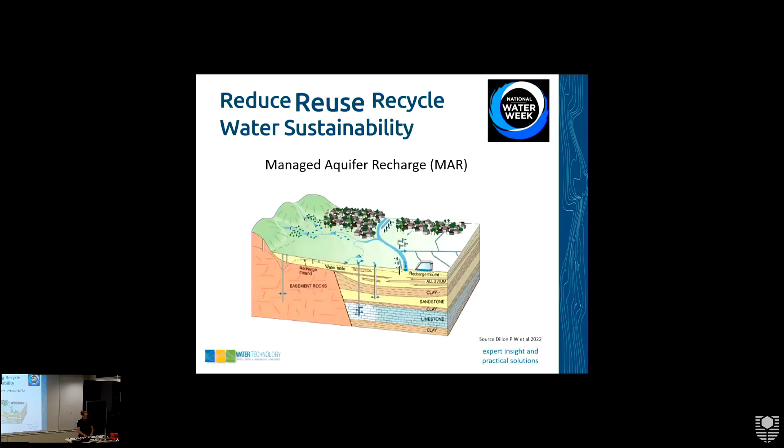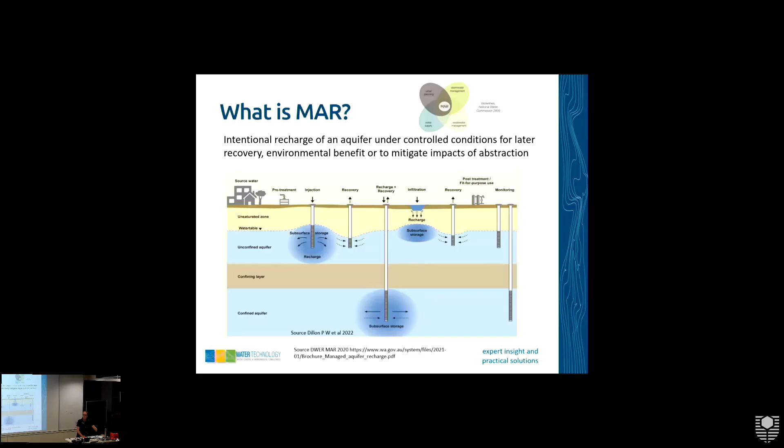So what is MAR? It's the intentional recharge of an aquifer under controlled conditions for later recovery, environmental benefit, or to mitigate impacts of abstraction. It can be very simple, including stormwater drains or storage dams, or they can be rather engineered, like injection and recovery systems. You can also get very complex stormwater capture systems on top of that.

MAR is successfully used worldwide for various reasons. It's a very adaptable technique, used for managing water supply, meeting legal obligations, restoring and protecting aquifers, maintaining minimum flows and levels, flood mitigation, water quality enhancement and protection, water reuse, and ecosystem restoration and protection. So a whole slather of options of how this technique can be applied.

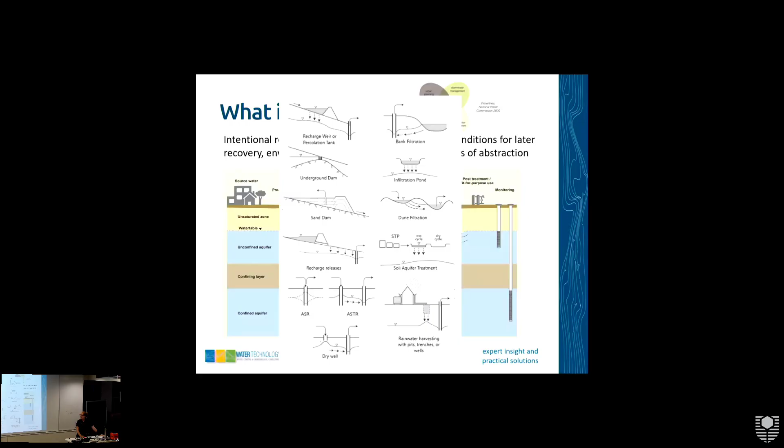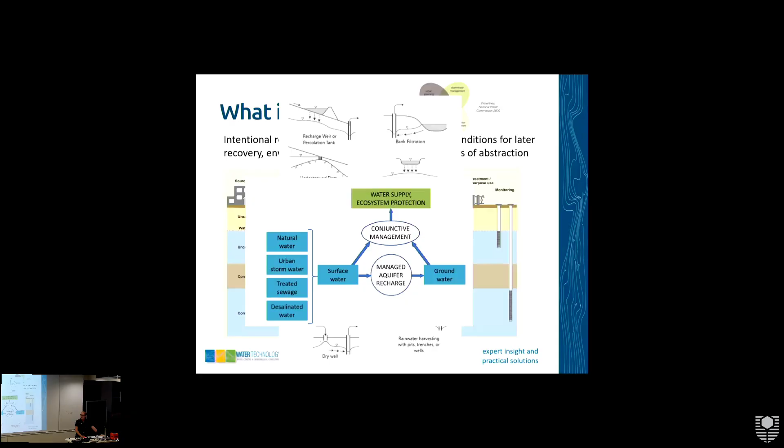General application of MAR in Australia is related to the capture of surface water, stormwater, or treated wastewater, which is directly or indirectly recharging the underlying aquifer system, to be later used predominantly for irrigation purposes or irrigation of green spaces.

So what are we doing over here in Perth? Well, we have 4 well-known MAR schemes. Some of you in the room probably know a lot more about these schemes than I do, but this is just a quick snapshot of these schemes.

The first one, and probably the biggest, is the Water Corp Groundwater Replenishment Scheme. Essentially, wastewater from the Beenyup wastewater treatment plant is treated to drinking water standards and then injected into the local aquifer system. It's then recovered to supplement Perth's drinking water supply.

I honestly didn't even realise that was a large part of our integrated water supply scheme here in Perth. The City of Mandurah uses wastewater from the nearby Caddadup wastewater treatment plant, which has been infiltrating via infiltration basins into the surrounding superficial aquifer. It's caused a mounding effect under that irrigation area, and that wastewater is then abstracted and used for irrigation purposes on green space by the City of Mandurah.

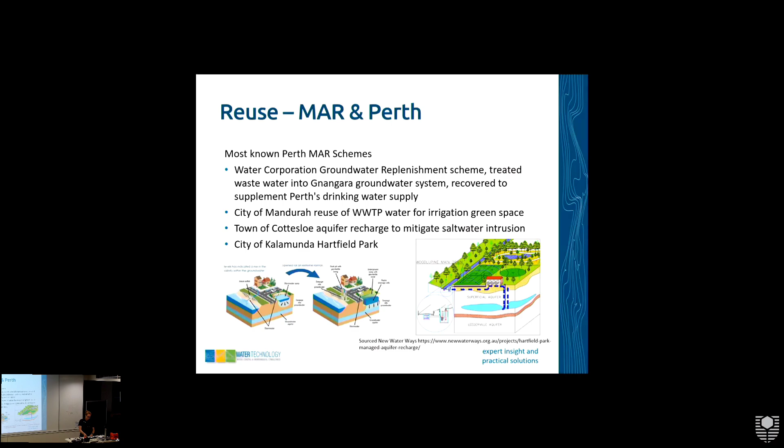So just a couple of examples of how MAR is also being used over here in WA and also in South Australia.

We were engaged by a client up in the Pilbara to undertake some groundwater modelling to help with understanding their drawdown impacts from mining and how that propagation extends into the Karijini National Park. They had a trial MAR scheme set up close to the boundary of the national park, and they completed a trial. We were engaged to model using that trial data and their drawdown data to understand if the MAR scheme, or the extent of it, can actually mitigate the impacts from mine dewatering.

This was a requirement from the regulator, so they had to do it. In the very first stages, we developed a groundwater flow model to simulate drawdown propagation from the mine dewatering and used the model to inform an optimised MAR scheme to mitigate simulated drawdowns.

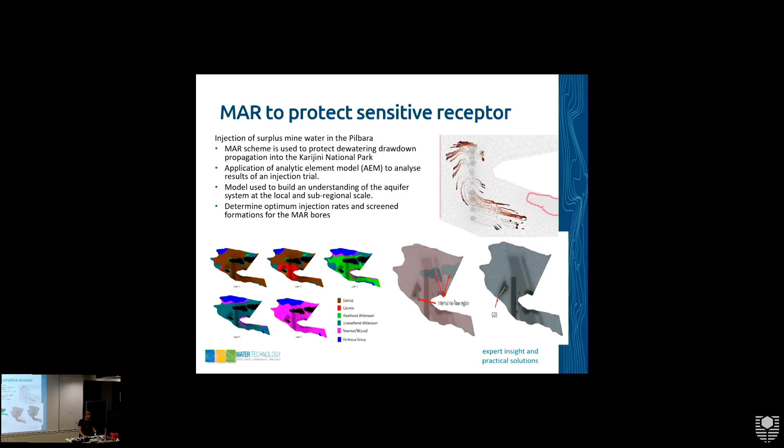Another example of how MAR or ASR can be used: the reuse of wastewater treatment plant treated wastewater to supply a horticultural enterprise with irrigation. It was essentially capturing water during winter when there was a surplus and then using it during summer when there's higher demand.

The treated wastewater was injected into the underlying aquifer system during high periods and then later recovered through the same injection, using dual purpose injection-abstraction bores. So we looked at the aquifer suitability.

The assessment looked at all the aquifer parameters, including aquifer thickness and hydraulic properties. Water quality is very important - if we don't put effort into the water quality side of things, it can catch us quite hard during implementation, especially in the operational phases, and it can become very costly. We also looked at the impact of proximity to other users in the area.

In terms of technical aspects, we looked at clogging and water chemistry changes from the injection water - is it actually going to change the natural water chemistry within the host aquifer? We also considered matrix dissolution, local effects on the overlying aquifer, piezometric pressures, effects on the preferred aquifer, and the likely occurrence of opportunistic pathogens developing and growing.

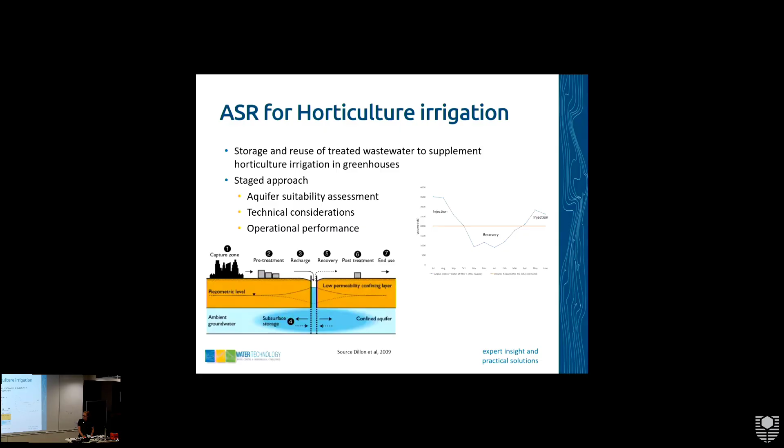Finally, the last example, probably one of the most common ones, similar to what we've already seen happening here in Perth - a golf course investing in the option of a MAR to support irrigation.

Again, capturing excess water and using it for irrigation. This particular golf course didn't have the luxury of being able to use the groundwater it sits on top of, because it actually became quite saline due to over-abstraction. So they had to think of another way of doing things, and again, MAR came up on the table.

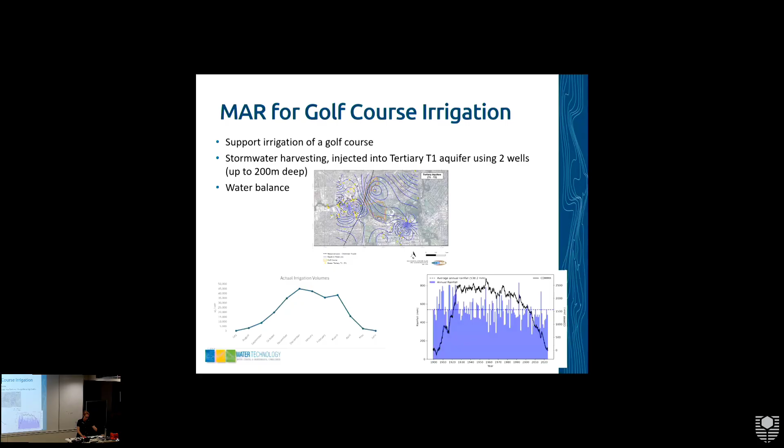In this case, again, we followed a very similar process - looked at the storage requirements of the aquifer, their operational water balance, the local hydrogeology and the implications that might have with injection water, and further investigated and supported them through the approval process to develop a MAR scheme.

Just a nice short sweet one for you all - summary and key takeaways. MAR is very applicable for Perth and more broadly WA to help with water sustainability. There's opportunity open for all industries to adopt the concept of MAR, like I've explained - in mining, local government, private use, wherever. And there's probably a lot of multidisciplinary action going on too, to get a MAR scheme up and running.

WA is in its infancy, which I like to think of as an opportunity when it comes to MAR implementation and applying it as a value-adding option. So it's about trying to get MAR on the table in that discussion as an actual option.

There's lots to learn from around the world. The rest of the world does MAR really well, especially over in Europe. And obviously our mates over in South Australia are leading the charge in Australia, I should say.

There's a big link between MAR and water chemistry, since a lot of you guys probably have quite a big chemistry background. I thought I'd better call that one out.

Clogging is a major issue with MAR. If that's not addressed early on, it's going to cause lots of operational issues, and that puts the whole MAR concept with a black stain against its name because it's not working, we can't inject the water, it's clogging up - those type of conversations. But if you're on top of it nice and early, there are ways to mitigate that.

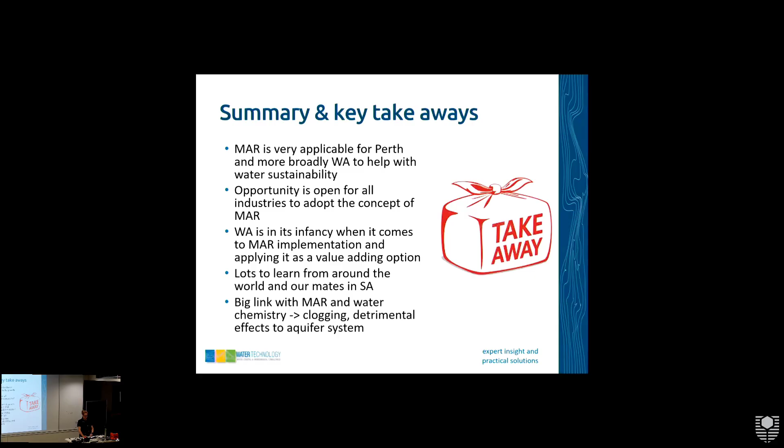Thanks everyone for turning up. I've taken a little bit of a different tact. Apologies for the slideshow, but rather than make this too technical, I'm going to run you through a couple of case studies and show you where we're at the moment on the Alkimos seawater desalination plant, which is full steam ahead at the moment. We're probably about 15 or 20% of the way through the construction phase. So just a little bit about me.

I'm an ex-graduate here at Curtin University, finished my PhD here, feels like a long time ago. Before moving across to industry, I first worked on the Kwinana desalination plant, so that's 2005-06 timeframe, and been in the industry ever since.

So just tonight we'll run through a little bit about osmosis and reverse osmosis, give you a run through on desalination, and then show you what's happening at Alkimos out of interest in terms of large scale desalination.

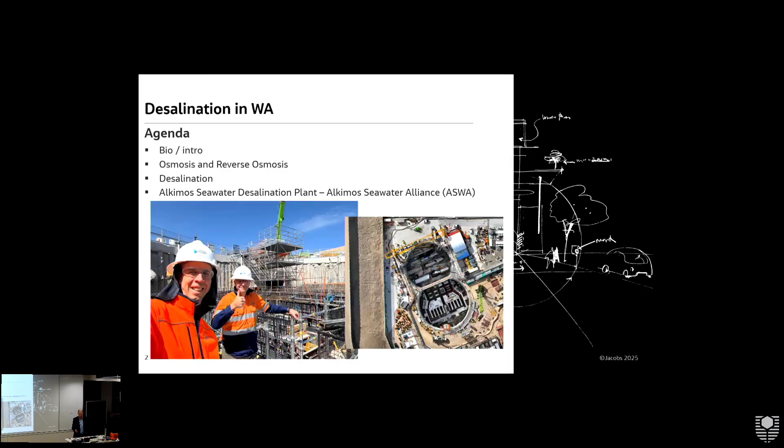This isn't going to be anything shattering for anyone in the audience here, but the central premise of what we're talking about here is osmosis and how we're going to overcome that.

Again, a fairly well understood concept, osmosis is nature's way of achieving equilibrium. The important thing is just having a look at the type of pressures we're trying to overcome. Obviously you can calculate osmotic pressure. Osmotic pressure of seawater is in the order of 25, 27 bar at 35,000 milligrams a litre, which is the salinity of seawater.

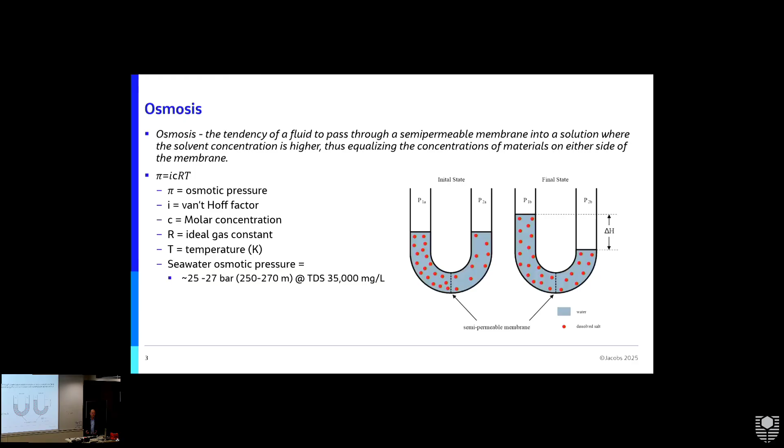So these are the type of things we have to overcome with reverse osmosis - just an easy way to demonstrate that. As we say, we're trying to achieve equilibrium, and this is what we're talking about in terms of the height difference. So this is the central concept of reverse osmosis, is overcoming that.

Inside there we have just over 30,000 RO membranes sitting inside a little over 400 pressure vessels in 8 racks. This setup here is delivering around about 10% of Perth's water just in this room, producing sort of 75-80 megalitres a day of drinking water. Just to give people some idea of the scale of what we're talking about.

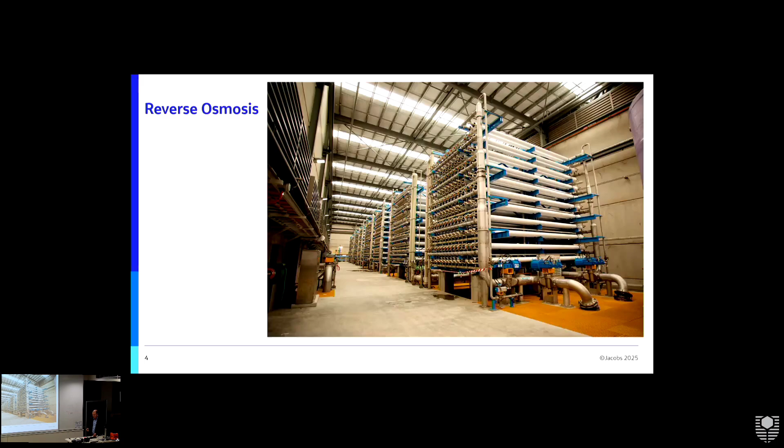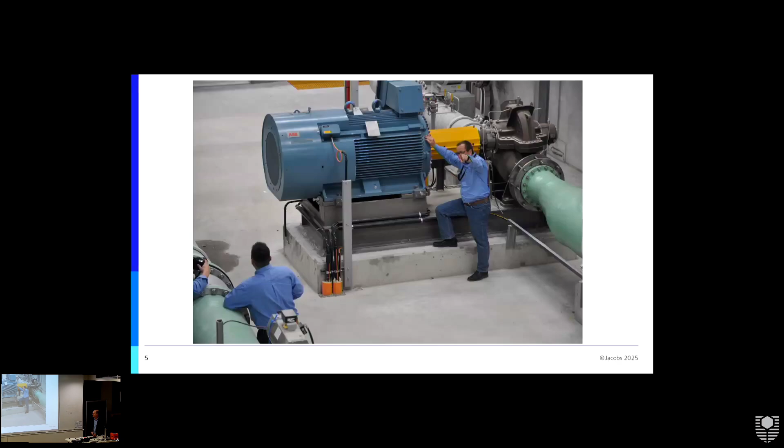This is Ulrich Boss, who was the commissioning manager of that project, standing at the first pass high pressure pump. We're taking about 300 litres a second of water there and increasing the pressure, at this point, from about 2 bar to a little over 60 bar on a continuing basis. Just so everyone's got an idea of the scale of what we're going through here.

I'll talk you through a bit of the pre-treatment, which is the crux of what we're going around here. Boosting the pressure through a first pass RO membrane. One of the things that makes this kind of economical is we only treat a portion of this water through a second pass system. All the seawater goes through here, and the purer water generated by the first few membranes in a pressure vessel bypasses that second pass system. The less pure water we treat again to get the product salinity down as low as possible, and then that water is disposed of.

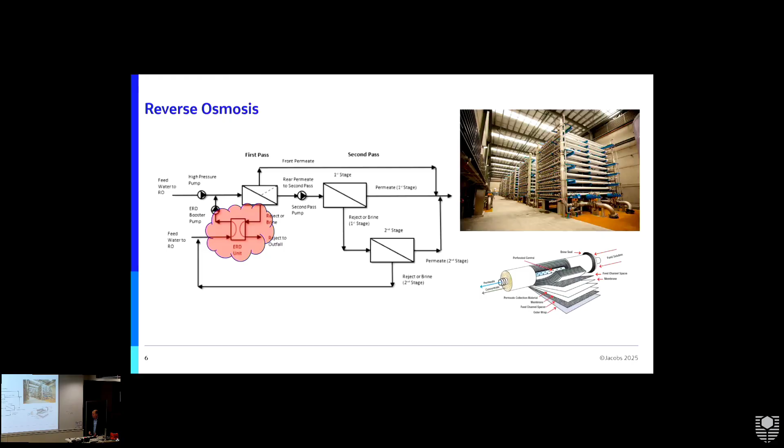I'm just going to run through here something I'm going to talk about in a second, and the thing that really makes seawater desalination possible is energy recovery. I mentioned before about the amount of pressure we have to generate - it's a very energy intensive process. Without this energy recovery portion of the plant, it's questionable whether desalination would be a viable method for producing water. Think of a turbocharger on your car, that's effectively what we're doing here. We're taking the energy that exists in this brine stream, which is sort of 60 bars worth of pressure, and converting that so we pump a smaller portion of that water. So that's the reverse osmosis process.

Again, in 15 minutes it's a bit difficult to get into too much detail, so what I thought I would do is run through a case study, and this is Alkimos. I don't know if you're familiar with the area, just south of Yanchep here.

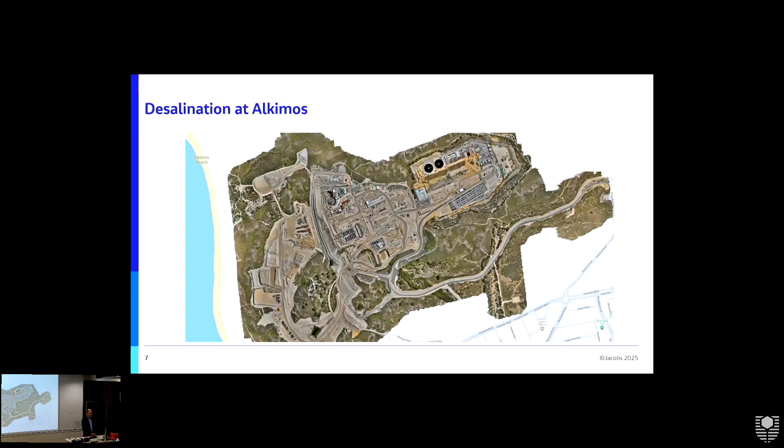This is the Alkimos plant last week. We fly a drone up there on a weekly basis, and this is where we're at from a construction point of view. So the Alkimos wastewater treatment plant, Alkimos as a suburb is just down here, Marmion Ave is about here somewhere. We're about 20% of the way through construction, and that's what it looks like.

So this is the desalination process at Alkimos. This is a simplified block flow diagram so everyone can appreciate it - you don't have to take too much into account what's going on here. As a process, what we're talking about is taking water from the ocean, and I'm going to show in a bit of detail in the coming slides - bringing in seawater from a couple of kilometres off the coast.

Intake pump station, which is what I was standing down inside of a couple of slides ago, pumping that water. This happens under gravity - it's just a glorified, simple U system. We take water off the coast and bring it into a pump station, then it gets pumped through our process. From a desalination process, even though the RO is the heart of the plant, the pre-treatment system in itself is probably the most important thing. If pre-treatment fails, your reverse osmosis process is very compromised.

So this is removing the solid component. RO membranes are quite susceptible to solids, so we're taking out near 100% of any suspended solids inside the water in this process. Reverse osmosis takes that very pure water and removes the salt, which we'll get into. We produce water in an RO system that's too pure - the salinity, or dissolved solids post RO, is in the order of 50 to 100 milligrams a litre, something in that order of magnitude.

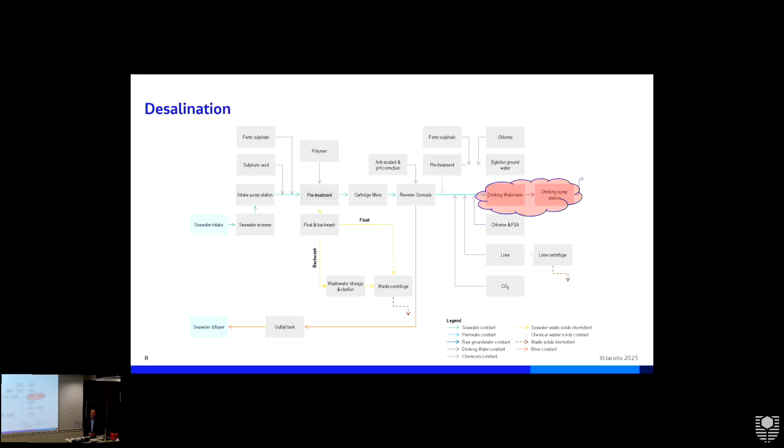We're then increasing the alkalinity and pH so it's suitable for drinking, disinfecting, and adding fluoride so your teeth don't fall out. Finally, pumping water - the water from Alkimos is heading to the Wanneroo Reservoir, about 25 kilometres away. We're at about an RL of 10, so about 10 metres above mean sea level, and Wanneroo Reservoir - don't quote me on this - but I think we're talking about 80, 90, 100 metres above where we are now. So we've got to lift that water, 300 megalitres a day, 100 odd metres in the air.

Just stepping through from a process point of view - apologies for the image here, I could have maybe done a bit better, but it was a bit last minute. This is a hydraulic profile of our intake system. In terms of level, we're at minus 25 here, and if you look on shore, the ground level where we are is at about RL 10.

So this water, eventually the tunnelling machine, which you're going to see in a sec, starts off just in here and makes its way down to minus 25. The tunnel itself is 2.5 kilometres long and 3.5 metres in diameter. So that's how our 600 odd megalitres a day of water is making its way onto shore.

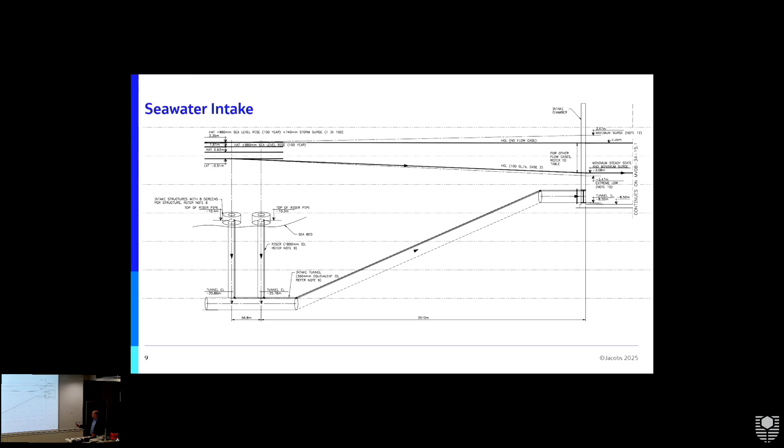Seabed here, so RL25 to 10.3, so we're about 15 metres below the seabed where the tunnel finishes. This is the connection with the ocean, and you can see up here we've got a couple of tide levels: lowest astronomical tide, highest astronomical tide, and then a theoretical highest astronomical tide with sea level rise out to 100 years. So effectively what happens to get water on shore is just flow all the way through this tunnel, and then it sits here under gravity.

So this is what the intake pump station looks like. I've taken some snips here from our design model, which is where all the construction deliverables are generated from. So this is the tunnel here. This is the inlet, so this is where this machine, which is just sitting here, actually launched on Monday, might have been Monday or Tuesday this week, started its journey. It goes through that little hole there, and this red line's just sort of showing where we're going.

So through some isolations here, we've got a stop log and a penstock. This device here is a band screen. We're sort of filtering water to about 6 millimetres in size, so taking out bulk solids, and then here's our pumps in here. So as I say, for some context, this is about 50 metres in diameter here, and about 20 metres deep.

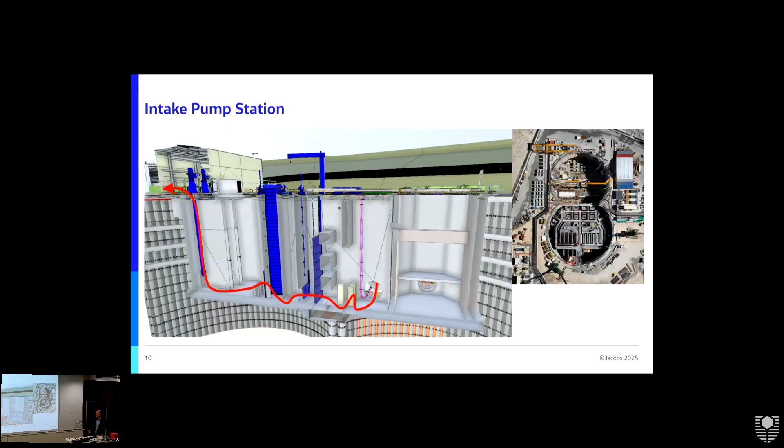So that structure was constructed earlier this year, and these particular works have been in the makings for the last 6 to 9 months, preparing for the tunnels to launch. They take about a year, the journey of the tunnel boring machines. The long one, which went first, that takes about a year, and we're about 7 or 8 months for the intake tunnel before it's drilled.

So the intake pump station. Just for some context, I took this photo, I think in maybe about, I'm trying to say May, maybe about that sort of time frame. So this is the tunnelling machines before they launched. As I say, 3.5 metres in diameter, internal diameter of the tunnel. It's them ready to go.

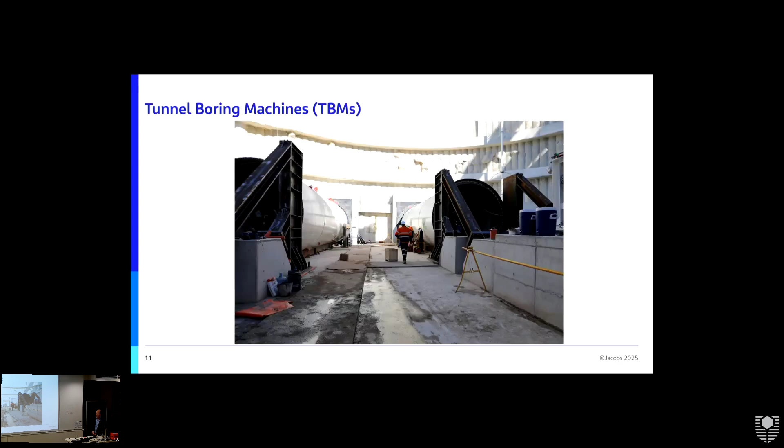So pre-treatment, as I said previously, this is almost the most important part of the process. If your pre-treatment fails, the RO membranes end up with a lot of restoration work that needs to be undergone, chemical cleaning, replacement, etc. So the Alkimos process, we have a dissolved air flotation system and a gravity media filter in a single structure. So what I've tried to demonstrate here is the flow path through that system.

This is about 80 metres length and 40 metres in width, just for some context. So water's entering the front here through this flow path here. We have coagulation and flocculation to remove that solid material. Then it makes its way up and over through some mixers through this tortuous flow path to give ourselves a retention time inside of these two chambers, and then flows up over a weir and through this central channel.

We have 2 streams. We've got 9 cells on one side, 9 cells on the other, 18 in total. They run in an n-2 arrangement, so we can have two off at any one time on each train, one out of service, one to backwash the system. This is just demonstrating the flow path through this train.

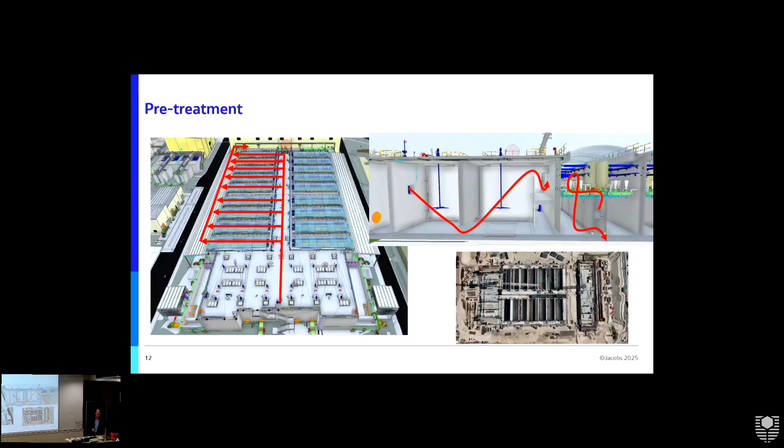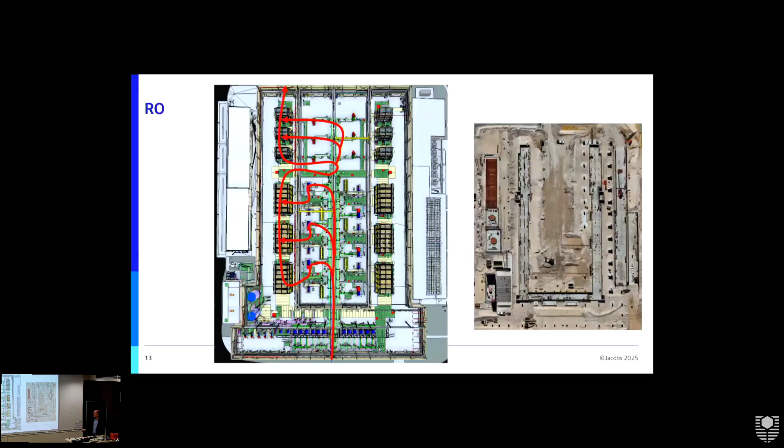So the RO is the heart of the plant. Again, simple demonstration of the flow path that we've got going through here. So there's a cartridge filtration, taking everything larger than 5 microns out of the process, and then 2 equal trains. Here's our first pass. We have in this plant 3 in train stage A and 3 in train B. First pass permeate gets conveyed along the central corridor, and then a portion of that second pass on each side of the plant here.

So what I really wanted to demonstrate, and I was talking before about the heart of the thing that makes this all possible, is our energy recovery system. So this is taking, if you imagine this is our membrane system here, we're taking the high pressure reject stream. So this is our brine flow.

If water is entering the membranes at 60 bar, it's leaving here at sort of 57, 58 bar. What we're doing in this process is recovering that energy inside of the system. It's a very simple process that's highly effective—we're recovering maybe 95+% of the energy embedded inside this stream.

All that happens is the rotor inside spins around. Fresh water's getting fed in, and as the rotor spins, that pushes a stream of fresh water out the other end, while the brine that has lost that energy is just pushed out as waste. All we're doing with this circulation pump is making up any energy losses through the system.

What this allows us to do is effectively pump half or a little bit less than half of the flow through this high energy pump you saw before, and the rest just gets a little boost to get the pressure up. So it's effectively taking away half of the required energy to produce this seawater.

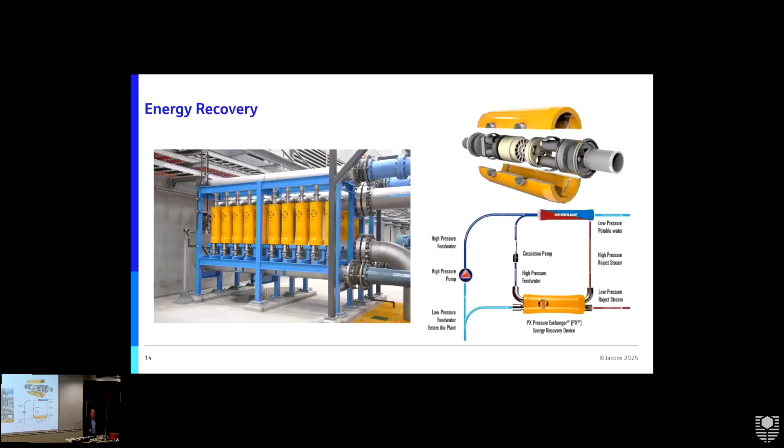If not for this process, as I said before, it's questionable whether reverse osmosis as a desalination process becomes economically viable in a lot of applications. So that's that for our purposes. This is how it looks like.

Again, here's the energy recovery system. We're taking the brine, it's getting passed through these energy recovery devices. These are just manifolded together, and then the low pressure brine is out to waste.

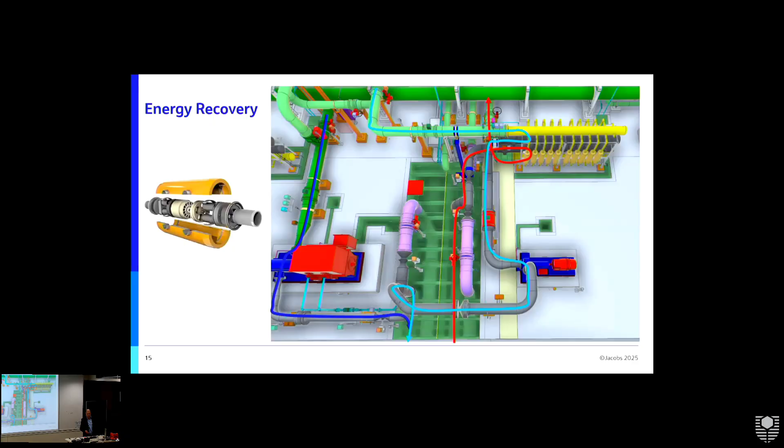What happens in this stream is we've got low pressure filtered seawater. Again, the energy is boosted. It goes through this much smaller pump, combines with the high pressure from the high pressure pump here. About 40% of the flow is in this stream, 60% in these streams. These two things get combined, make their way through the RO membranes, and that's how it all works.

Just finally, I've got a couple more slides. Hopefully I'm going okay time-wise.

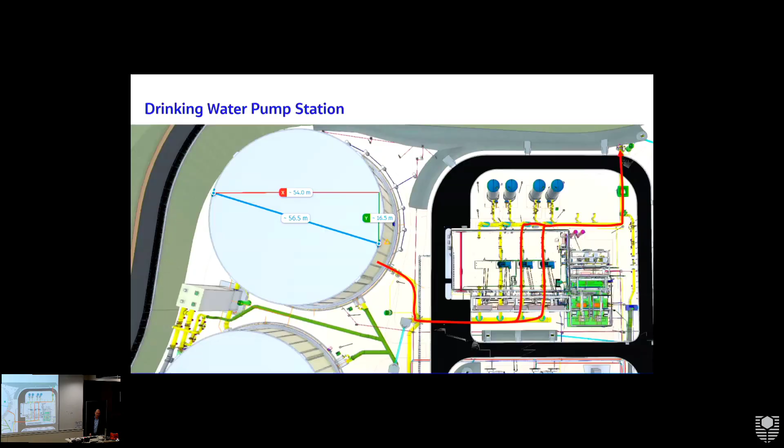Just for some context, there is 50 megalitres of storage for this water. So we're talking in stage 1, sort of 8 odd hours of storage. In stage 2, maybe about 4 hours of storage—hope I got the maths right there. And it's delivered through the pumping station up to Wanneroo Reservoir. So nothing too complex about that.

One thing I did want to touch on, maybe a bit of chemistry to finish off, just for everyone's benefit. Something that's quite ingenious, I think, in this process—certainly the first time I'm aware of it in Australia, and I don't actually know of another application elsewhere in the world where this is being done. But we're taking treated groundwater from the Eglinton groundwater scheme, a relatively deep aquifer in the north of Perth, and that is getting blended with the permeate prior to distribution.

So this is quite high alkalinity groundwater, and what this has done in this instance is reduce the chemical demand by up to 50% in this process. I was talking before about the remineralisation we need to do to bring permeate up to drinking water standard. By blending this relatively high alkalinity source, we're cutting the chemical demand at Alkimos by about 50%. So that's hundreds of thousands of dollars a year in savings, producing exactly the same product we would without that process.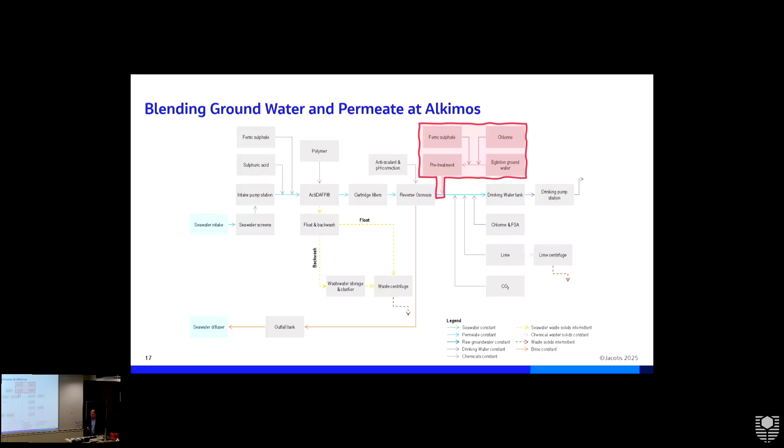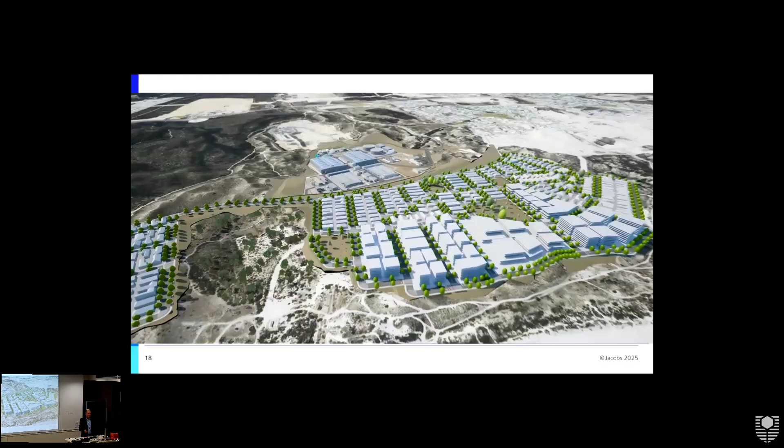So that's it. This is what it's going to look like at some point in the future. Just a bit of a sales pitch, but yeah, it's tucked away in there—you can sort of see what's going on. And as I say, looking forward to talking to anyone about it at any stage later on. Thank you very much.

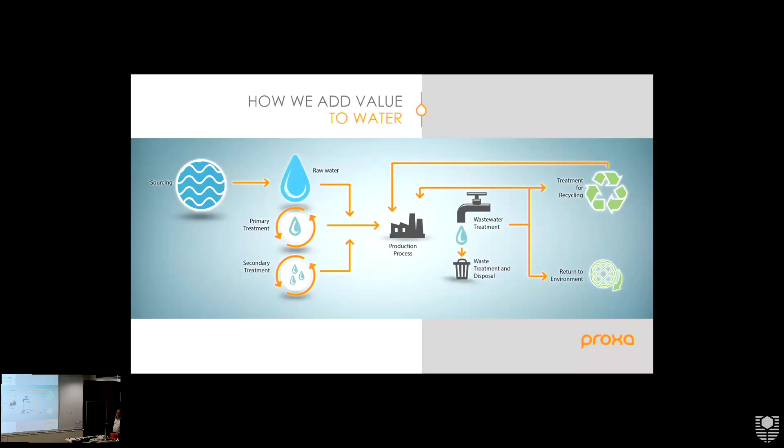Within the water treatment space for plants, we work across all areas in the water cycle, typically more with industrial sites and less with desalination sites. We work in raw water, and recycling within plants, which is a big focus with water scarcity across Australia. In terms of industries, we work largely across all industries, but predominantly we see a lot of work with the mining and mineral sector, and a little bit in food and beverage and municipal.

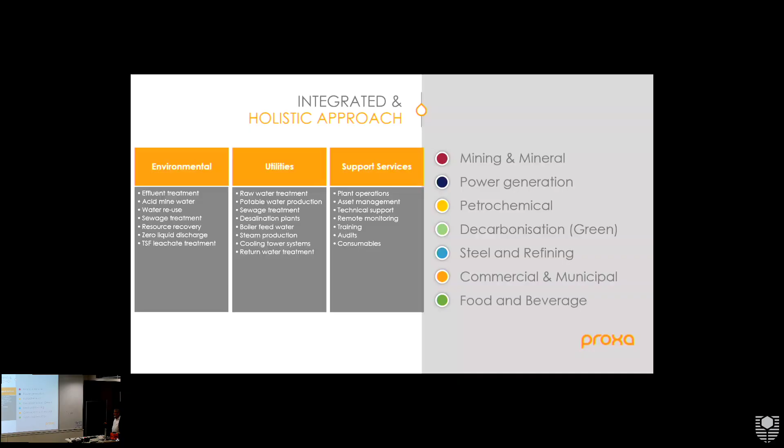This is interesting to me. I suppose I've spent - and I should have said my background - I'm a bit nervous standing in front of so many intellectual people today, it's a bit of an unusual crowd for me. But one of the things that makes my job quite interesting is I've been involved in water treatment for about 25 years in different roles and different businesses.

What we do is very much across the whole cycle of the project. So surprisingly, a lot of my time was spent in an operational space, but the most impact you can have on a project and the water balance and water use is in the design phase. So a lot of the work that Proxa does is working with clients in very early stages of development, so in PFS and DFS, where they're working through their water balance and their solutions, and working with some of the engineering houses like Jacobs and a few others.

But lastly there's mine closure - we were talking with another engineering house yesterday about the number of closure projects around the world. As regulation has increased around the world, we're seeing a lot more focus across all industries about the requirements of water management, and to simplify, making good after you've left a site. So it's an area that we spend a bit of our time in as well.

So I'm going to be talking a little bit about these early stages, looking through the whole project life cycle. In terms of our organisation, what usually makes us somewhat unique is we spend a lot of time in the R&D space and the design space.

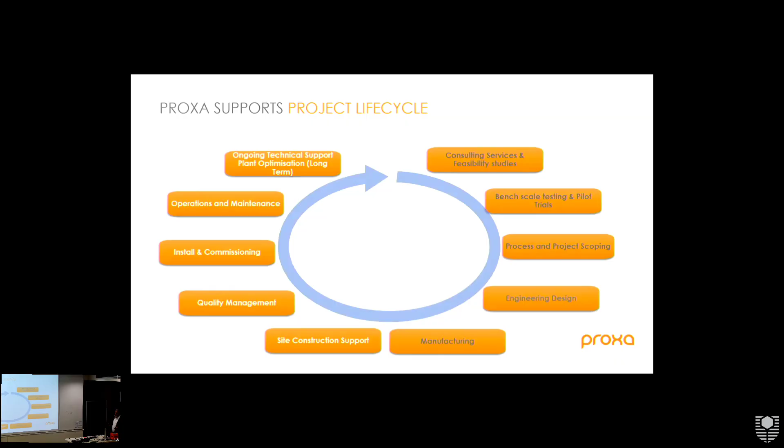So we spend a huge amount enticing people of a strong technical nature into our business. What's unique about what we do is we don't tend to do as much standard plant work. Yes, we do potable water treatment plants - someone will ask me, oh, do you do potable plants? Okay, yeah, we do, but that doesn't excite us.

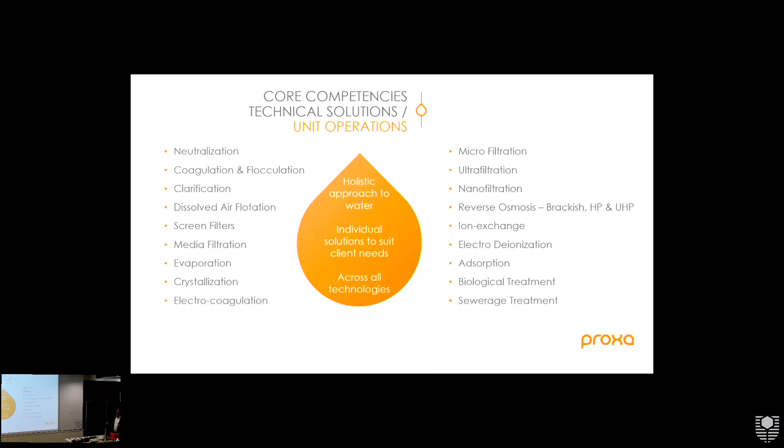What's really interesting about our organisation is when I bring one of those curly problems to the team and say, hey, we've got this, we may not want to touch this - and they go, no, that sounds interesting, and everyone gets in and steps in and gets involved. So we'll leverage a lot of these different technologies regardless and try and do something with some very difficult water.

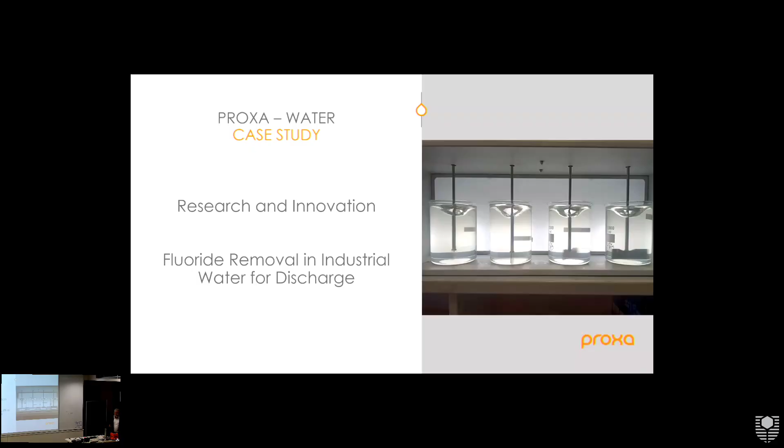This isn't too difficult, but this was an interesting one that we came across - so I'll go through case study 1. It was around fluoride removal in industrial water for discharge. So talking about environmental considerations, a lot of our clients take their water and may have to discharge it to the environment, whether to rivers or aquifers or wherever, and we've got to make sure it's up to spec. So for this, I went with the theme Tamsin gave me of innovation and research - I used an AI tool that I'd never normally like to use for definitions, but I thought I'd just put this in.

I spend a lot of time working in a sales role, and we throw out that word innovation all the time. For the last probably 15 years, someone said, yeah, it's innovative. I like this one because it's about implementing new ideas that generate value. What I'll also say is sometimes a new idea for one client and one industry is an old idea for someone else, but it's still considered innovation because we've made a step change for that client.

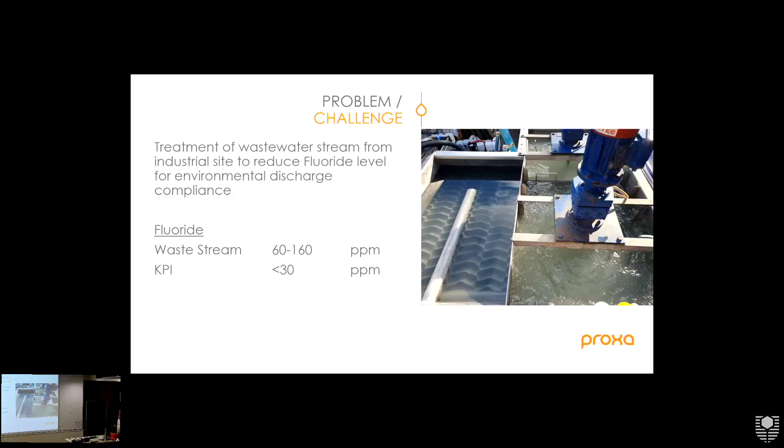Research is a cornerstone of how we do what we do. So this is a good flow sheet where we had a problem: they had fluoride issues in their waste stream. Industrial site, I won't say more than that in terms of non-disclosure. We had a waste stream fluoride of anywhere between 60 and 160, sometimes 200, sometimes 300 ppm of fluoride. This was considered far too high, and they kept getting letters from the regulator saying we need to be less than 30.

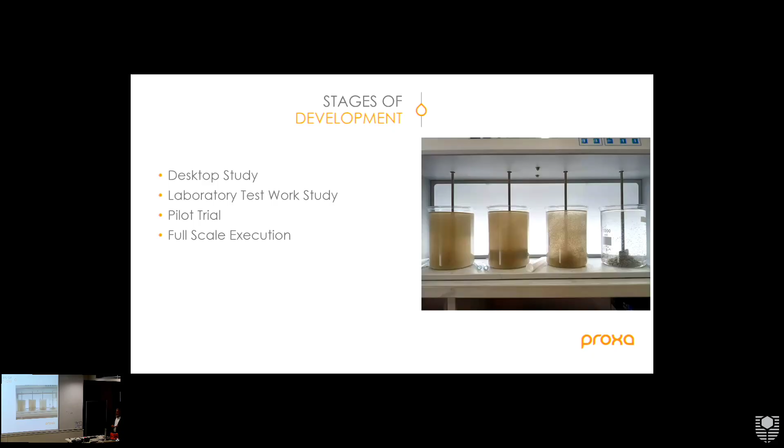So they wanted to look at treatment processes where we could manage that. This is really where that innovation and research aspect comes in - we took an approach where we went through multiple stages to help our client get a solution, which included a desktop study, lab test work, all the way through to a small pilot trial to validate the process, and then looking at full-scale execution. We were looking at different methodologies about what we can do. We still read the literature, so we appreciate universities making more research, more literature - that is important. We have our global R&D group, the Brains Trust if you will.

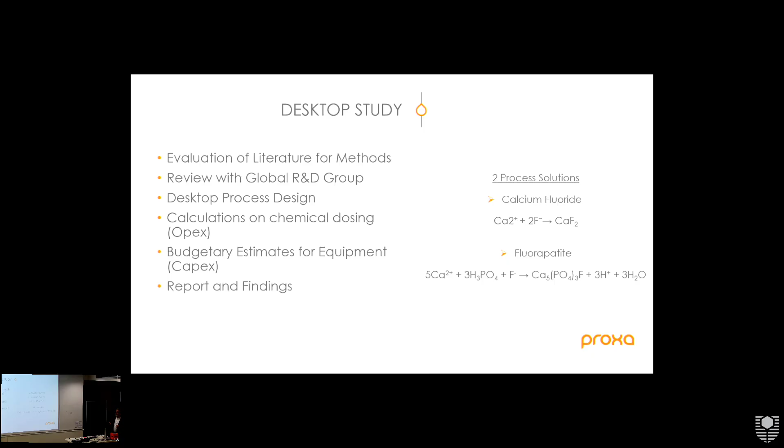In that first stage, we look at the desktop process design. There's a lot of focus on CapEx and OpEx - we have to deal with the commercial realities of life. We can't just say yes, I can make this work. We have to ask, is that going to be effective in terms of a cost expectation? So typically in this space, it's a high level: can we do it, what are their options, and what is it going to cost? So we looked at two methodologies: calcium fluoride precipitation and also the fluorapatite process.

So we progressed from that to the lab test work. I don't have all the pictures, but I put up a few. For those in the room that have done coagulation, flocculation test work, it looks a lot like this - it can take hours and hours and hours, and it doesn't always get results. But good news is both of these were effective. We got good settling rates across both, some slightly superior - I think the fluorapatite method was a little bit superior in terms of the settling rate. The big issue was what was the residual fluoride we were seeing, and that was really helping us determine, as you do this test work, what size of clarifier you need, which then goes to the CapEx and OpEx portions of the design.

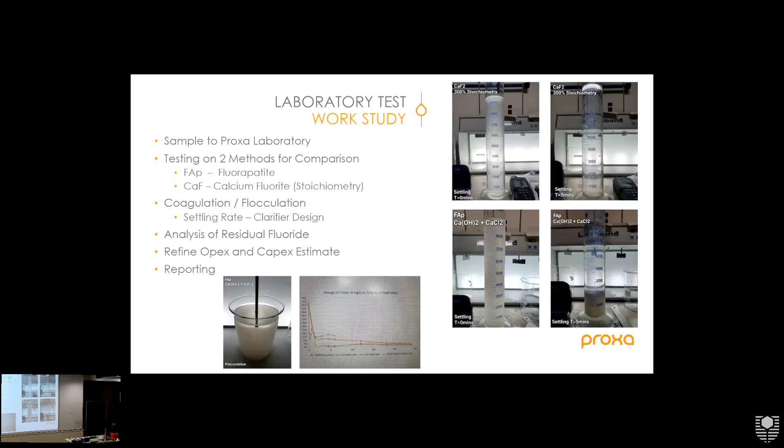So we were able to refine the estimate and then say to the client, yep, here's what you could build, here's a process solution that'll take you out of a risky environmental condition into where you're getting a big green tick from the regulator. However, as many clients do when they're going to spend plus millions of dollars, they wanted to have a look at a trial validation.

So again, coming at it from, dare I say, a research and testing point of view, we've got a lot of pilot equipment within our fleet. We do lots of those unit operations I showed on the earlier slides, so not too dissimilar from things we do see in the research space. We took to site this lamella clarifier, a very small version with the lamella plates inside, and did a two-month trial on site. What happens on the beaker or the column is very different to what happens on site.

So this is where graduates come in - it's a fantastic job for graduates. Our graduates spent two months on site, with some challenging issues with feed qualities, different fluoride levels, which I'll show you on a graph in a minute, and pH stabilisation. When we have a pilot unit, I'm not saying it's bad gear, but it's very different engineering to what you'd have on a full scale. Do you have two sets of pH control? Have you got data logging? No, we don't have all that, but we've got most of it.

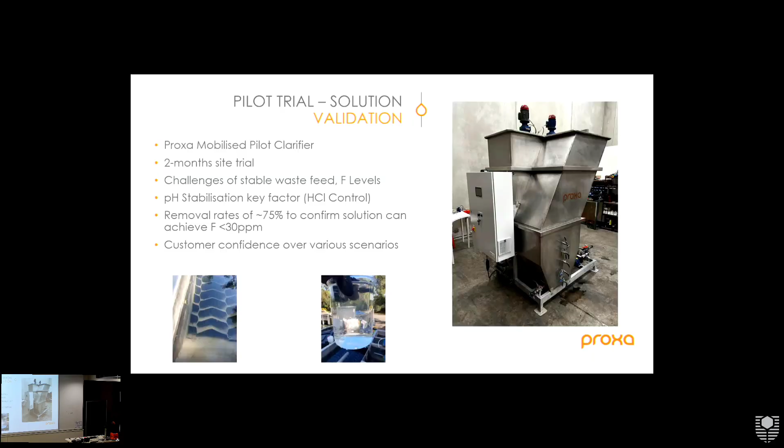Doing piloting always comes with challenges, but we had, in the end, some very good results. We got a 75% removal, and we were able to achieve less than 30 ppm, which was the target. In fact, some of the time we got down to 20.

Our graduate had to get a truck each day, find some waste of the concentrated version, get the truck guy to drive it around the site to mix it in the back of the tanker. It was a lot of fun. And then we did some testing.

We actually did three different scenarios. Block A and Block C were more indicative of the typical variability of the waste, in which case we always got the overflow down below the 30 ppm mark, which was great. And we had a period where, I think it was a lab analysis issue, where the lab was reporting something and the ratios of mixing in the back of the truck were wrong. So we thought we were really struggling to get below the mark, and we were, but we actually were able to prove the process for much higher ranges of the fluoride coming in.

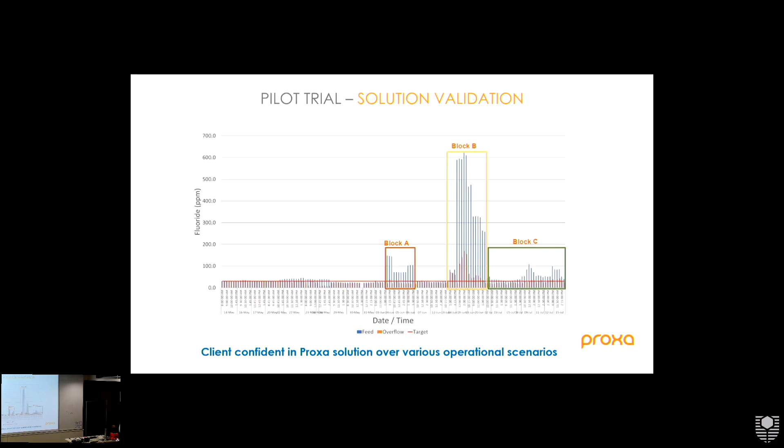So the client was able to go home with the satisfaction that we've tested and trialled a solution that even if they had those upset conditions in their industrial site, they wouldn't have an issue. That was a real win for us, and the goal of any organisation like ours, and the client, is to get confidence in the final solution and move forward to full-scale execution.

Proxa is a global organisation, and I left out the slide with the globe, but as you can see, this is probably not made in Australia, but we are making, at present, a number of lamella clarifiers here in Perth for a different project. We go through everything from project management, fabrication, we can either install or do supervision, and then go through commissioning and performance testing. This one's not fully installed yet, but it's on its way.

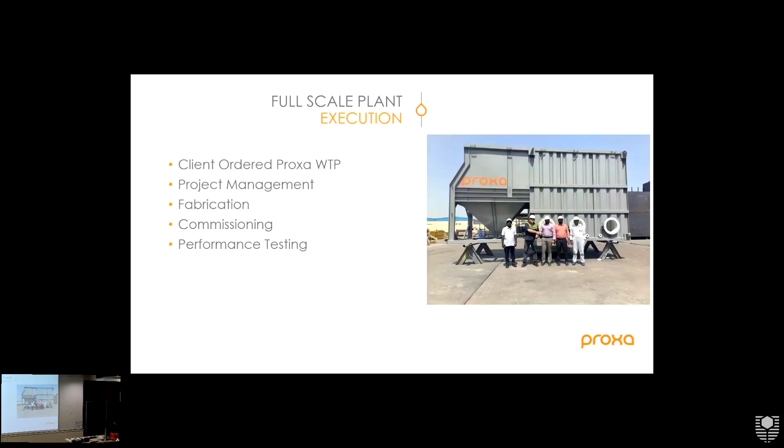So that's our first case study. The second one is really focusing on membranes, and I know that was one of the other topics we've heard quite a bit about, so I don't have to talk about reverse osmosis too much, which I appreciate, that was good, more technical than I was ready to go. But really it's about what we see in industry in Australia and Western Australia.

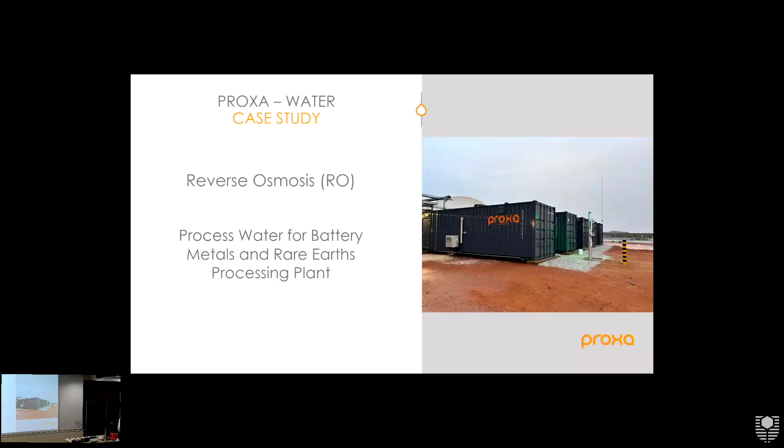One of those hot topics in the world at the moment is all about battery metals and rare earths. If anyone saw the news this week, this is a hot topic of conversation. As we talk about water scarcity and aquifer recharge, it's that availability of water. One of the things we see is that battery metals and rare earths really require a good quality of processed water. Depending on where you are, there are some plants in Western Australia that are fairly remote, and typically the water you get out in these areas - I lived in Kalgoorlie for a while - the water there can be 100,000 to 200,000 microsiemens.

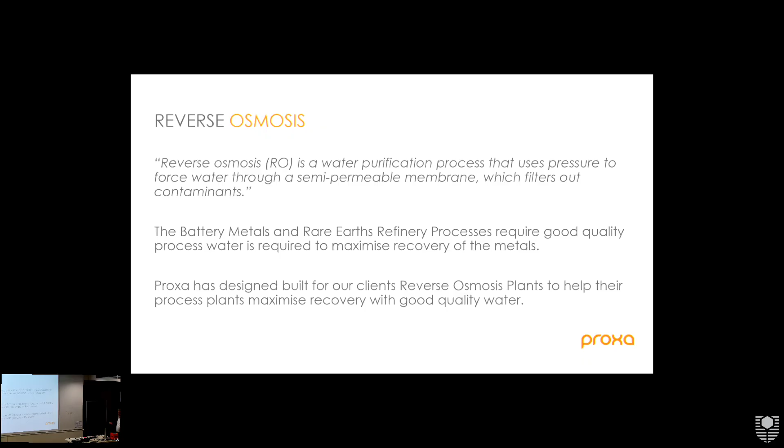I personally looked after plants in a different life where we used 200,000 microsiemens, and that was their process water. It's not really friendly. Not as bad as this for some of these guys, but essentially it's a big focus for these types of clients to have better quality water.

So, reverse osmosis - oh, I've jumped ahead of myself, I'm talking and I had a slide for it. Yes, we do see typically some of the bore water is the better stuff, that 3,000, 5,000, maybe up to 10,000 mark, but you can go higher, as we've talked about seawater membranes and higher pressure. The typical impurities that are a problem are calcium, magnesium and sometimes boron, but there can be a host of other things depending on the process.

Certain species will poison different aspects of the process, but what we're seeing in lithium and rare earths, and certainly in the flotation space, is the impurities can have a very big impact on the yield. So even 10 to 100 ppm difference can have an impact of like 5 to 10 or 20% of yield.

When you're talking about an industrial mining refinery, that's something that upsets management. They tend to get a little bit upset.

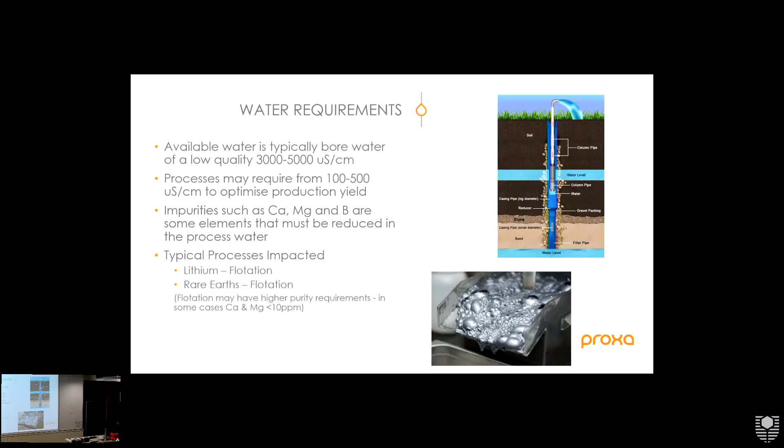In some instances, we've done modelling for PFS in certain projects at the moment, we're talking calcium magnesium down to 10 ppm. For those that worked in a lab, calcium at 10 ppm is pretty much background - it's really hard to get to that level of purity.

So you've got different levels of reverse osmosis: brackish water that we just talked about, high pressure, and then ultra high pressure. For those that haven't heard of ultra high pressure, we're now talking about up to - we just heard, was it 60 bar? Ultra high pressure in some cases will get us to 115, 120 bar. So it's got its uses in terms of concentration, but then also polishing RO.

Put the last one down because it's a bit of a fun fact - a lot of people that are, I'll say, non-technical backgrounds, expect the water to go in the black box and come out the other end nice and clean, and they don't really account for the fact that it has a waste stream. So we get clients going, 'oh, but you've got all this waste, it's upsetting our water balance.' And we say, yes, that was in the design sheet.

So it's something that a lot of clients, when we go and talk to them - and I'm sure some of you are in this space and have had these conversations - brine disposal management is something else that we see that comes up as a challenge for these clients.

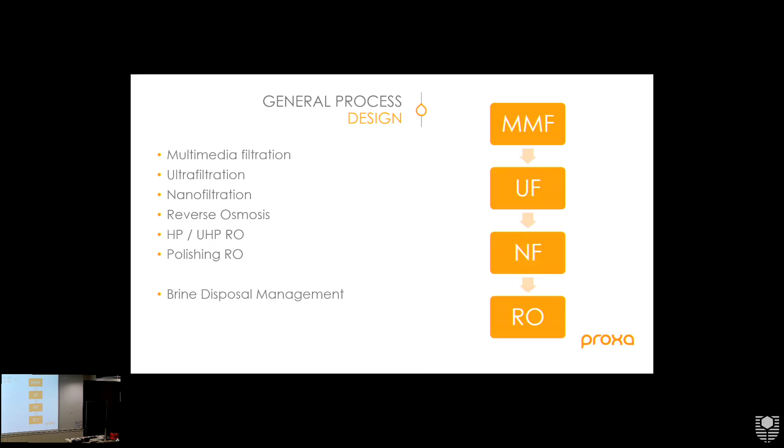I've got a few examples of projects that we've been doing in Australia, and we've got one here - again, it's bore water feed. We had initially a fairly simplistic design of multimedia filters and then RO, but the design was upgraded later for an additional 2 ROs. What that was really doing is running a second stage to treat the brine and improve the recovery. So this is the layout here.

I suppose it's probably a good time to mention that what we're seeing a lot in industry with water at the moment is it's all about mobile units. The cost of labour in Australia is somewhat high, and building things in remote locations can be very expensive. So modularisation and the ability to get something to site and do the absolute bare minimum of install - that's why you see things like 40-foot containers with HDPE piping across the top.

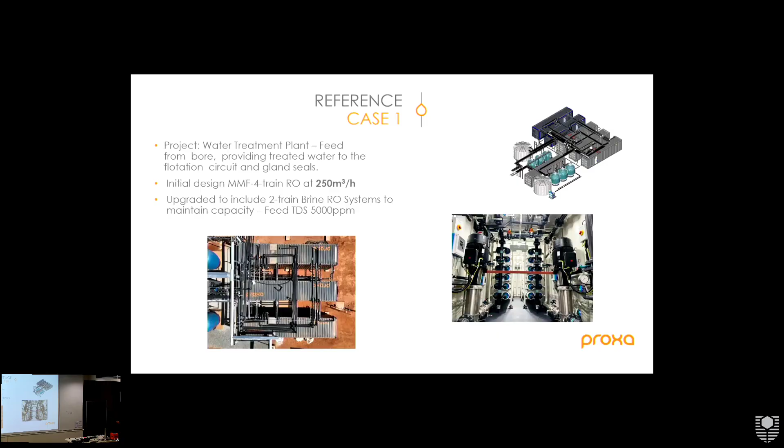This is another similar facility, currently in commissioning. We've got again very similar multimedia filters - you've got the vessels outside, and all of the control housings inside the container. Then we've got the RO systems with varying stages of pressure as it goes up, to look at that increased water recovery so that we're not wasting as much of the scarce bore water that they do have.

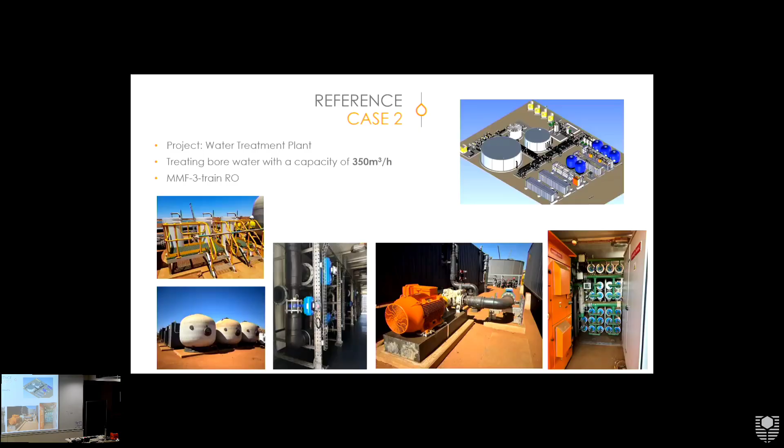So again, water scarcity - how much you've got for bores in your aquifer. These guys probably reprocess a large percentage, I won't name it, in terms of the design, so that they can manage their water balance. So it's really critical that we can take it, and there's quite a few pre-treatment stages outside of this box to make sure they remove contaminants or any other solids before it goes through our package. It's very interesting, very exciting, good to be getting involved with these type of projects.

That's all I've got. I hope I was quick enough.